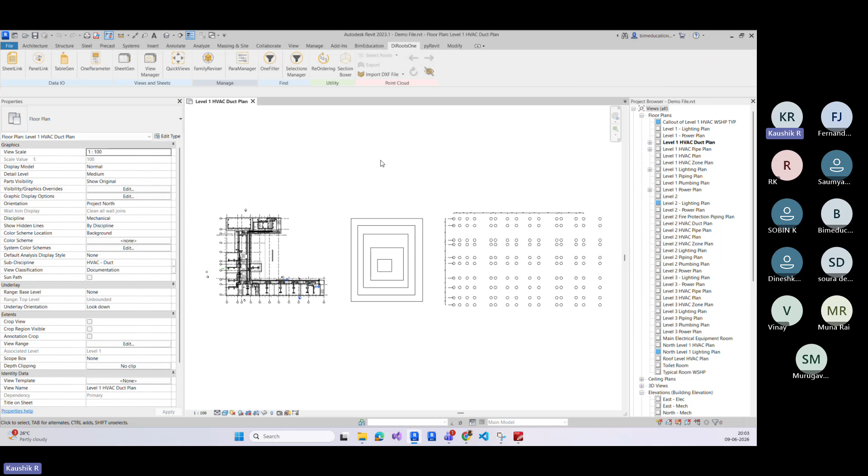Okay, before directly jumping into automation, first we have to understand why we need a plugin in Revit. In general, in Revit, if I go to the Revit tab, we have a plugin called DiRoots. From DiRoots, we have several sets of plugins. What is meant by plugin? The first question is, why do we need a plugin? Why do we have to use DiRoots? For example, in DiRoots, we have a tool called Pro Sheets. What is the purpose of Pro Sheets? How many of you guys are aware about the DiRoots plugin and still using it in your organizations? Can I get a thumbs up? How many of you? Okay, anyone? Good, good, good. So what is the purpose of Pro Sheets in the DiRoots tool? Through DiRoots Pro Sheets, we can export sheets with respect to our sheet name.

But do we have the same functionality in default Revit? In default Revit, are you able to export sheets? Can I get a yes or no? Are you able to export sheets from default Revit, sheets to PDF? Nobody done that one? Yes? Okay yes, of course we can do it. So in case if you are able to do it from default Revit, then why are we using DiRoots?

Because DiRoots gives some additional functionality. While exporting itself, I can customize the name, the file name, like what the file name has to be. Like that, I can do some customization. So that is the benefit of a plugin, guys. In Revit, not only Revit, you can take any software like AutoCAD, Revit, Navisworks, or general software like Word, PowerPoint, or Excel. So everywhere we can generate a plugin. What is the function, what is the purpose of a plugin? It means we are adding functionality to the default software, meaning whatever functionality you could not get from the default software.

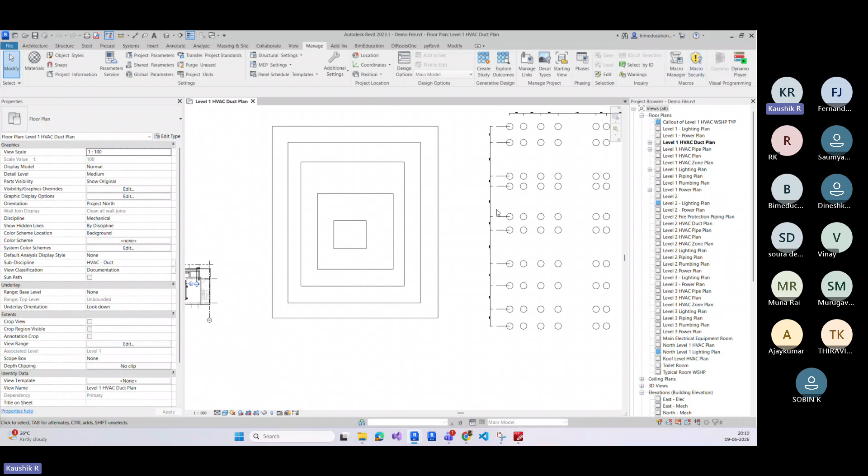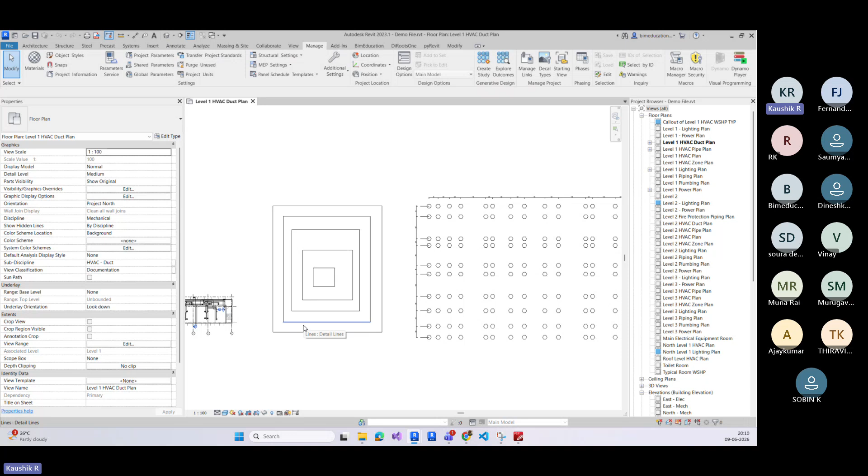Okay, minimize. Consider this is a CAD line. So how are we supposed to do design modeling? We do have design files through AutoCAD, right? So we have to import our AutoCAD file through our floor plan, and we have to draw our MEP elements - not only MEP, Revit elements, which means it may be wall, pipe, duct, conduit, cable tray, whatever it may be. That's how we are supposed to model our elements. Consider I have a floor plan where we have to create MEP elements like this. So what I'm going to do here is convert every CAD line into Revit elements.

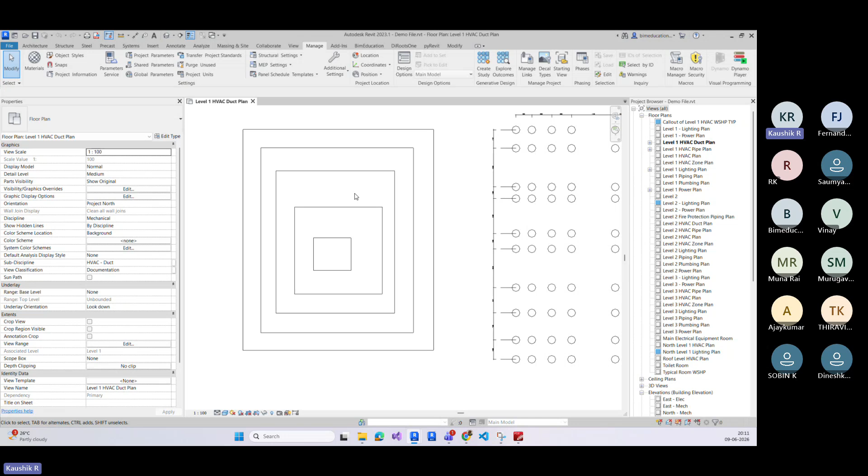Consider here I do have elements already in Revit itself, but in the actual course we will let you know how you can extract those lines from an AutoCAD file. I'm going to come to Dynamo. So here I do have elements, I'm going to select this one, minimize, select the entire lines. Just right clicking, freeze, run was started, run was completed, minimize. If you see, now all my lines were converted into walls. How much time will it take? Within 1 or 2 seconds we can complete the modeling. So this is one example, and another here we have another example.

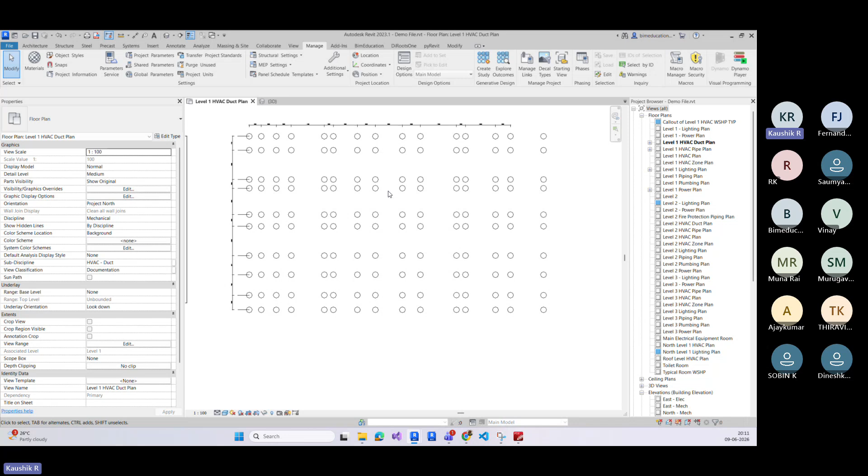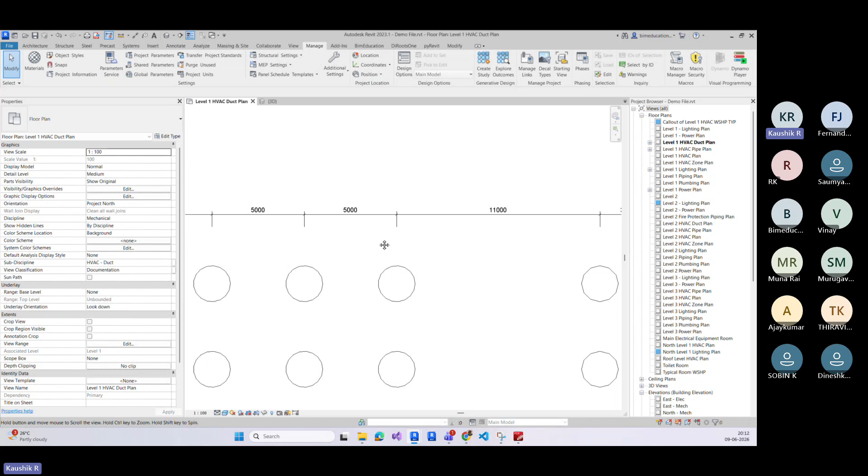We need to place families. Consider you are working for electrical stream, and you have to place multiple families like security devices, fire alarms, smoke detectors. For one floor plan you have to place around 1,500 families, and consider you have to place for multiple floors, and it is not typical. So how much time will it take? Also it is not generic, not following a common dimension - initially 4,000, 5,000, 5,000, then 11,000. Vertically the dimension is 4,500 to 10,000, 3,000. The dimension is not equally distributed, so you could not use array options - you have to manually place. So how much time will it take? We are going to automate this one.

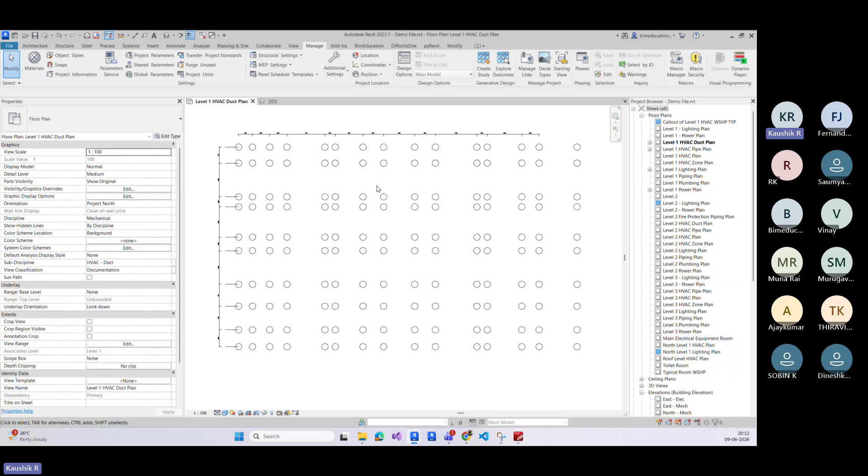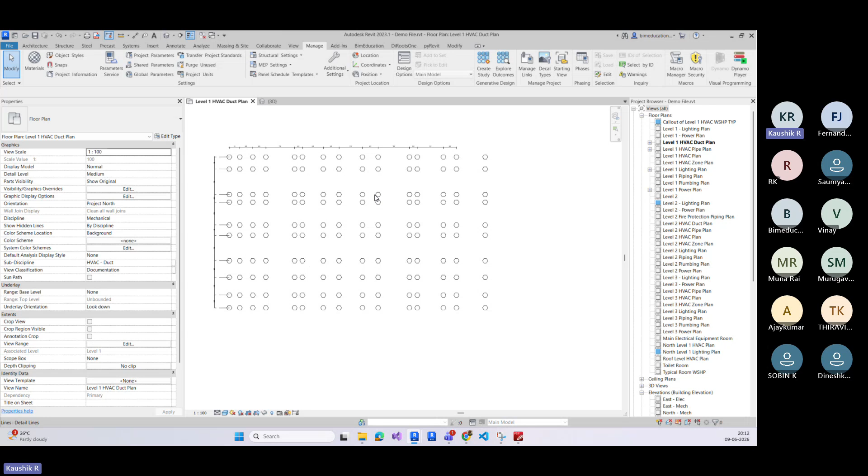Again, here we are taking examples from Revit itself, but once we start our actual class, we will show how to extract that information from the AutoCAD file. Coming back to Dynamo, this is for wall creation. I'm going to select, minimize, select all the source references, and coming here, freeze and unfreeze, select the run button. Run was started, run was completed. If I minimize, I can see all the families are placed. How much time will it take? 1 or 2 seconds.

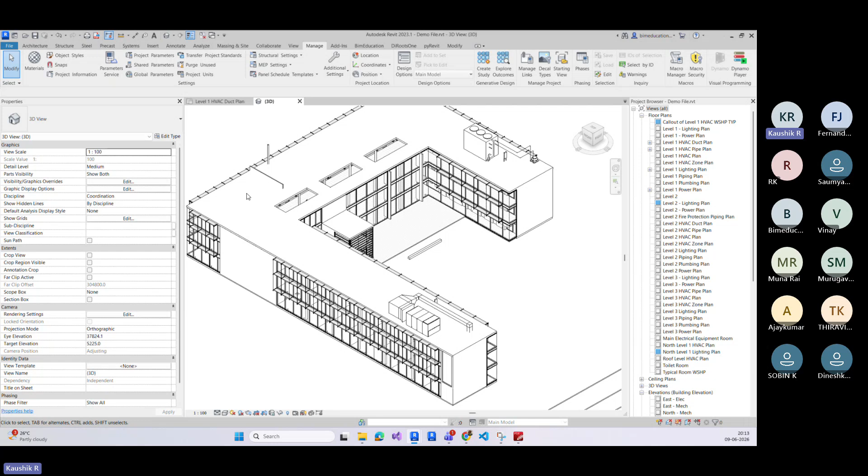Now this is the example for modeling. I want to do clash detection between wall and duct - wherever wall and ducts were intersecting, which means clashing. I want to extract those elements without Navisworks. Minimize, unfreeze, I'm running the tool, run was started and that was completed. If I minimize here, wherever wall and duct were intersecting, I highlighted those elements. Not only can you highlight, you can extract those element IDs. If I scroll, there are 166, 163 walls clashing with the ducts. If you want, you can extract those into Excel data. So you no longer need to go to Navisworks each time to get the element, right click, and take the element ID - you can easily extract into Excel.

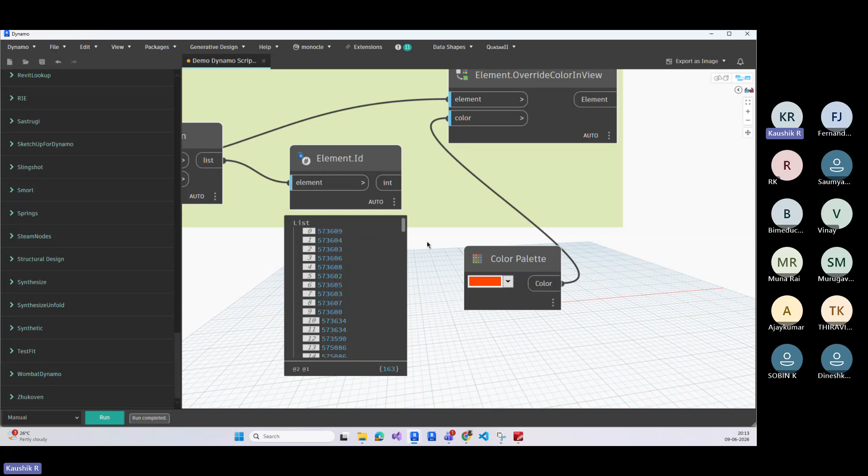Other example, sheet creation. Consider here I only have 5 or 6 sheets. I want 10 sheets at a time. Come back, select, right click, unfreeze, run was started, run was completed. If I minimize, I can see 10 sheets were created. How much time will it take? Only 2 seconds. Now is it clear? Again, in this example I only showed you how to create a sheet, but in upcoming classes I will show you how to create a sheet and how to put your views into the sheet. Is it clear guys? Can I get a yes now? Is it understood - like Dynamo, we can utilize it for each and every stage of construction?

Can I get a yes? Yes. Good, good. Okay, shall we go further? Yes.

Okay, good, wonderful. Now I have understood - if I'm working in Revit, I should know Dynamo, irrespective of the discipline. You may be working in civil, structures, architecture, plumbing, electrical, mechanical - irrespective of disciplines, if you are working in Revit, you should know Dynamo. Dynamo is not an additional skill, Dynamo is a mandatory and essential skill. If you know Dynamo, ultimately you can save plenty of your production time. Next one - now I have understood I should know Dynamo, but where do I have to start?

Where I have to start is to know and understand how Dynamo will work. That's what we are going to discuss now.

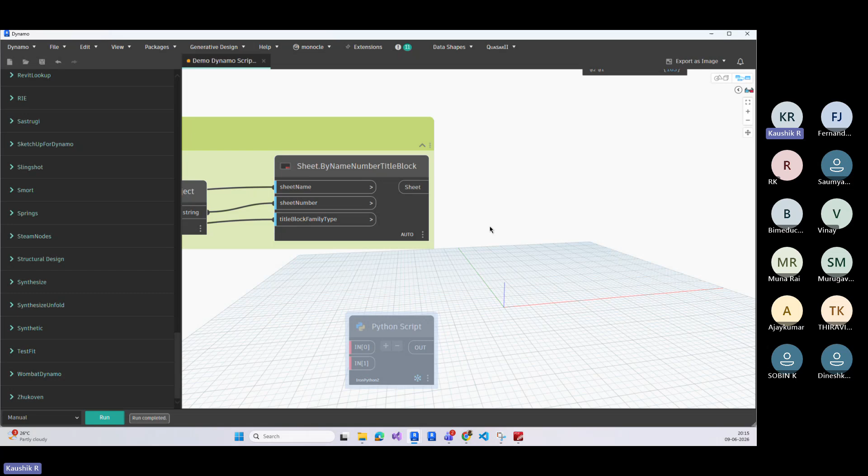First, you have to understand what is meant by a node. The simple question: what is meant by node? A node is nothing but to do some Revit operation. It may be anything - creating sheets, creating walls, creating levels, creating ducts, creating pipes, creating parameters, changing parameter values. Whatever work you are supposed to do in default Revit, the same thing you can achieve through Dynamo by means of nodes. For example, here I have created a wall by using this node.

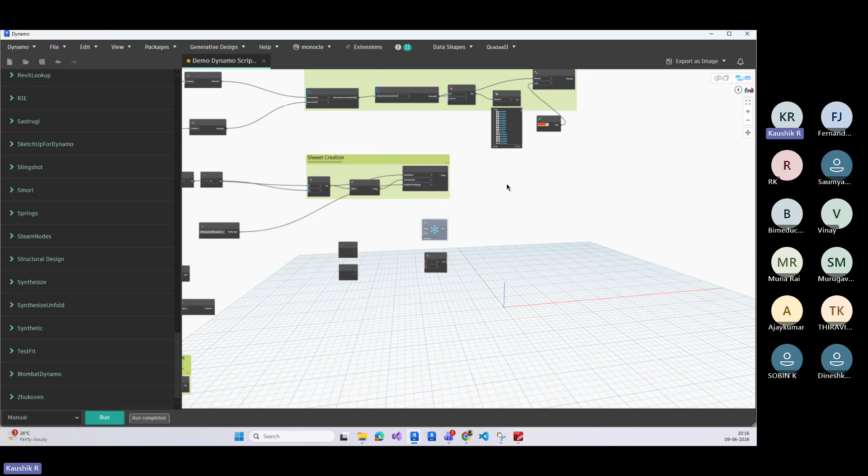I have placed a family by using this node. I have done clash detection by using this node. I have created a sheet by using this node. Later, you may work on any kind of task, but whatever work you are supposed to do, you can achieve the same thing by using a node. Is that clear, what is meant by node? In general, a node is nothing but to do some operation in Revit.

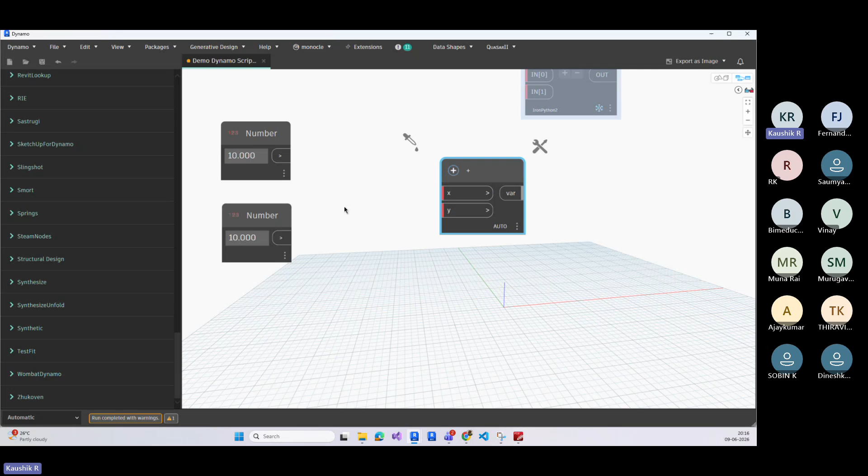I'm going to give you another example. Let's keep it as automatic. There is a node called the addition node. What is the purpose of this node? To add two numbers. I'm giving input 10 here and 10 here. What is the value of 10 plus 10? What output can I expect from this node? 20. If I hover over this, yes, we are getting 20.

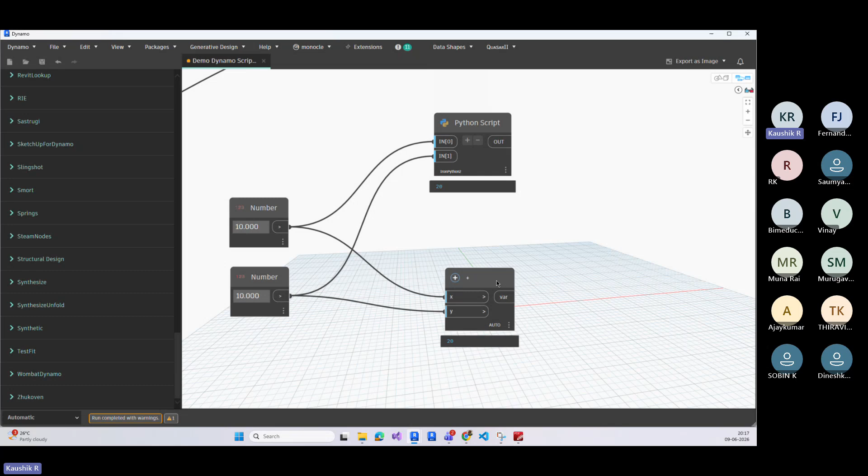The same node I have created through a Python script. Here also I'm giving the same inputs, 10 and 10, and I'm getting the same output, which is 20. Now we understood what is meant by node and what a node is made up of. These two are the same nodes, but this one was made using Python. I'm double clicking this Python node so we can see what it's made up of.

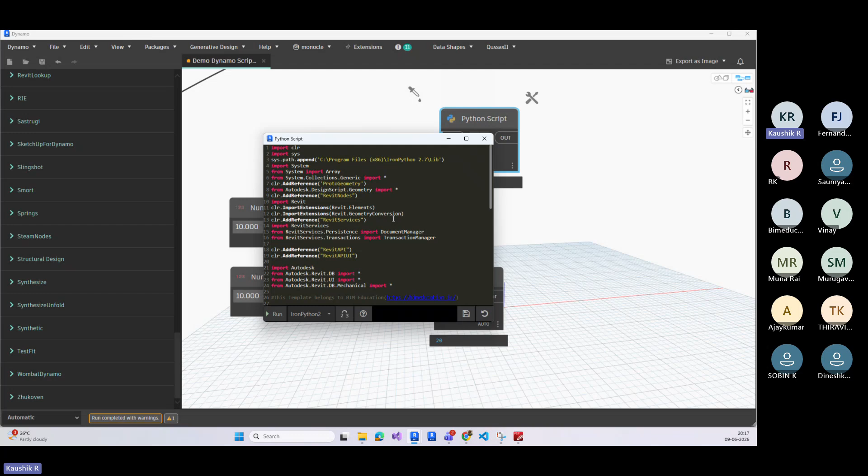It will take 2 or 3 seconds. What does it contain? What is a node made of? Nothing but programming lines. We don't know programming, that's why Autodesk and other developers have already given you a set of nodes to do Revit operations. By connecting inputs, you can achieve whatever operations you are supposed to do in Revit. Is it clear what is meant by node - Revit operations - and what a node is made up of? Nothing but programming lines.

Yes, I know I was a little fast, but we need to complete so many topics, that's why I was in a hurry. But when you join the class, our class will not be like this.

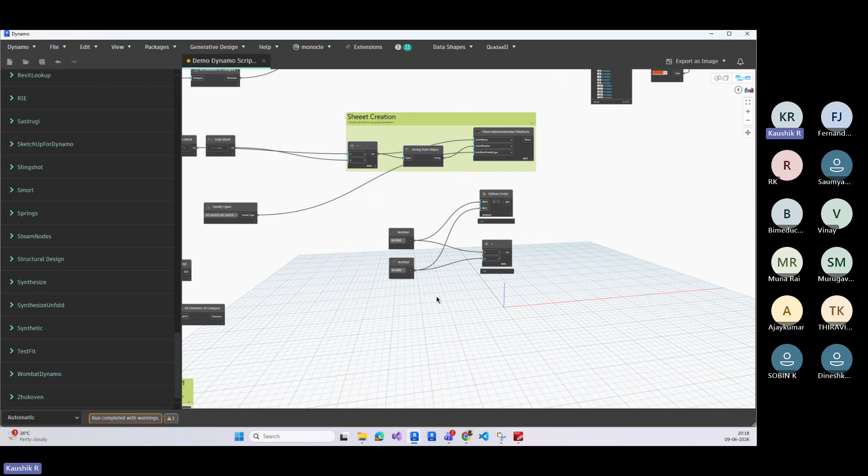Now I have understood what is meant by node and what a node is made up of. Now we are going to discuss how to connect two nodes. Here I have two nodes, categories and all elements of category. Why do we need this? This is the first tip of our demo class: whenever you are working in Dynamo, whatever task you are supposed to do, the first step is you have to bring your Revit elements into Dynamo. I'm telling you once again, whatever task you are supposed to do in Dynamo, the first step is you have to bring your Revit elements into Dynamo. There are other ways to do this, but this is one way, which is categories and all elements of category.

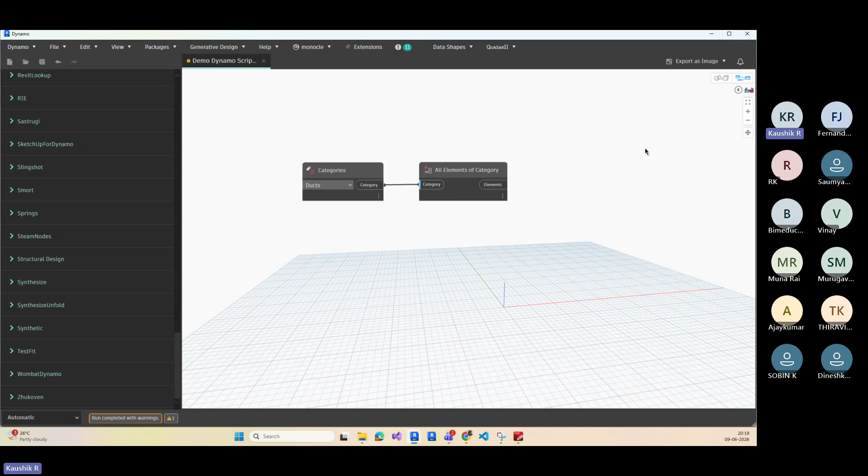What does it actually do? When I select the category, which is duct, it brings me all the duct elements into Dynamo. Once I bring my elements into Dynamo, whatever operations I wish to do, I can add parameters to this element, change the parameter values of those elements, delete the element, or move the element. Whatever actions I want to do on those elements, I can perform. Is that clear? The first rule is you have to bring your Revit elements into Dynamo.

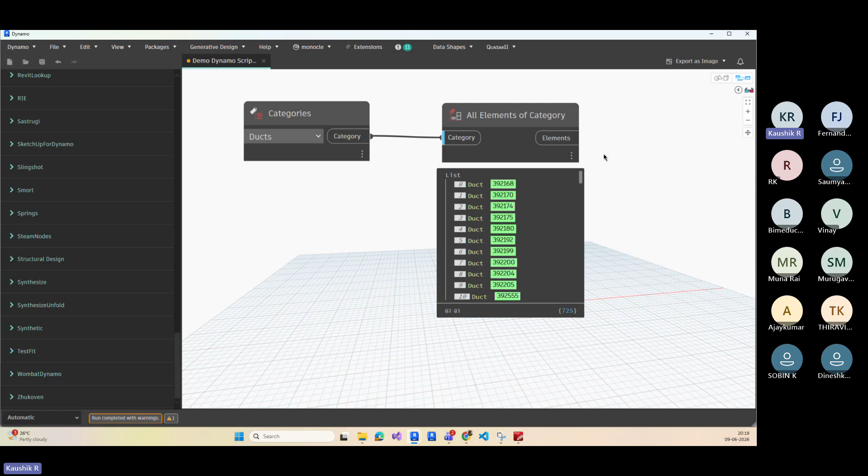Yes, wonderful. Now, second question: we have understood what is meant by node and what a node is made up of. Now here is my question - how to connect these two nodes? What is the logic behind that? What principle do you have to follow?

Okay, let's take another snap. So just give me one second. Let me connect my notepad. Where is it? Where is it?

Here, I do have the category, right? And here also category. Okay.

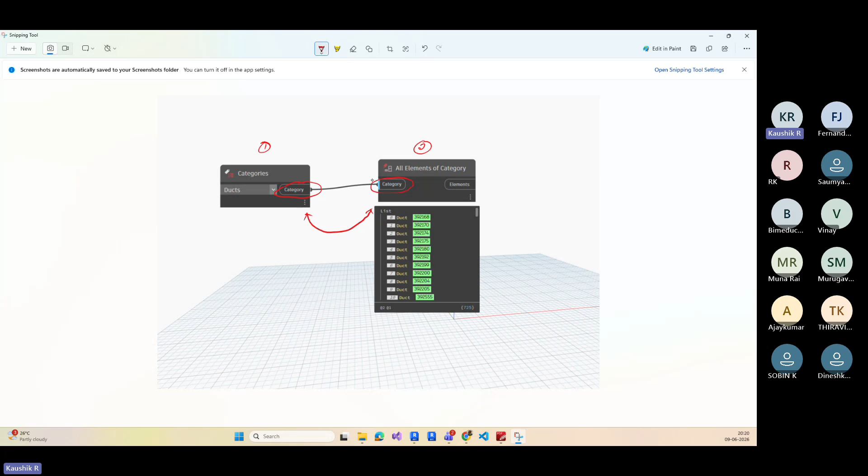Whenever you are connecting these two nodes, you have to understand one simple logic here. This is my first node and this is my second node. Whenever you are connecting two nodes, first node's output always equal to second node's input. This is the formula, okay.

What is the first node output? It was showing category. What is the second node input showing? Category, same category, which means category equal to category, right? Now my formula was satisfied. My requirement was satisfied, which means I can able to connect these two nodes.

Is it clear? Now, yes. Any doubts? What is meant by category here? Which is nothing but data elements, no, which is data type. Is it clear, guys? Which is data type.

What is meant by data type now? What are the data types currently we do have? Coming back here, we do have data types like integer, string, double, and boolean.

What is meant by integer? Which means it have to be whole numbers, 1, 2, 3. It is a general programming concept. This is the only programming concept which you have to understand, not anything else. Integer means whole numbers, 1, 2, 5, 5, 6, 3, 2, 8, 8, 9, 9, 5. These are the whole numbers.

String means alphabets, BIM Education, Dynamo, Kaushik, Beta, Revit. These are alphabets. What is meant by double? Numbers, but with decimal values, 0.5, 52.56, 89.55. Okay, what is meant by boolean? Yes or no, true or false, zeros and ones.

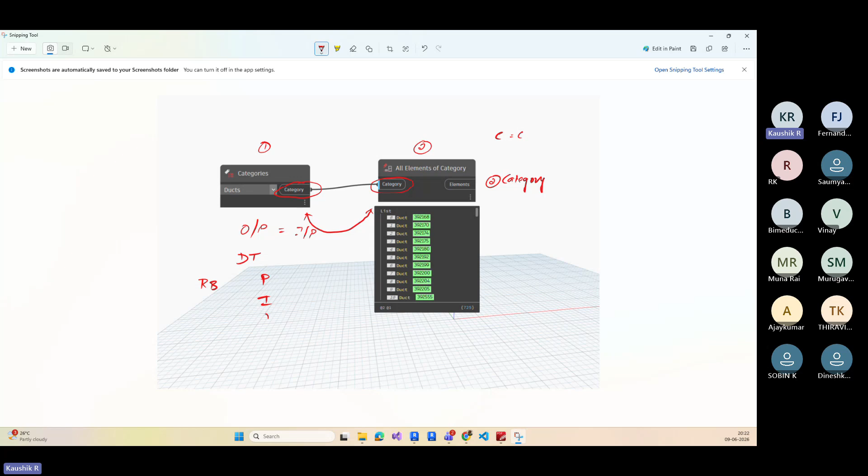Data type, we do have two types, which is Revit based data type and program based data type. In program based data type, we do have integer, double, string, boolean. Revit based data types, we do have so many, which is category, elements, wall, pipe, duct, everything. It's a Revit based data type. Is it clear, guys?

So far, anyone have any doubts? Wonderful. No, sir.

Okay, here, when I talk about data types, so right click, I'm searching for the data type. Yes, I do have string. Okay, I right click, I'm searching for a boolean. I do have the data type.

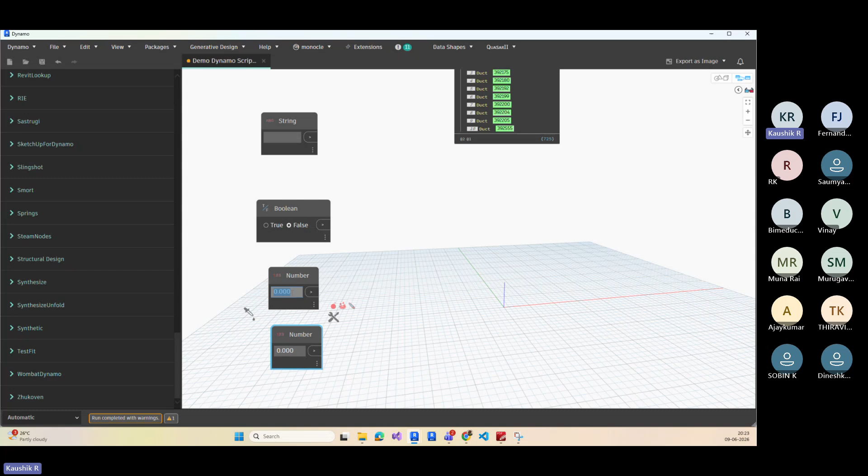Okay, so what else data type we do have? Integer and double, right? I right click, I'm searching for integer. Okay, that is a number slider only. So what we have to do, through the number node, we can able to create both integer values, 55, and double values, 55.65. Clear, guys?

Anyone have any doubts? Now, this particular node was expecting category data type. Yes or no? Instead of giving category data type, what if I give the string data type? Will it accept or not? I think it accepted, but error it's showing.

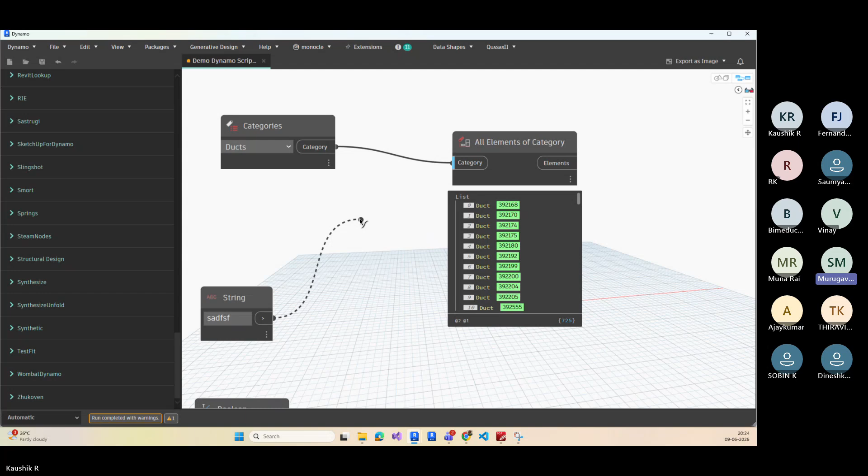It won't accept. If I connect this one, it will show the error. When I hover the error, what it was telling: ElementQueries.OfCategory, which is nothing but the name of the node. It was expecting, which means you have to connect either category or else view. It will accept only category and view, but was called with string.

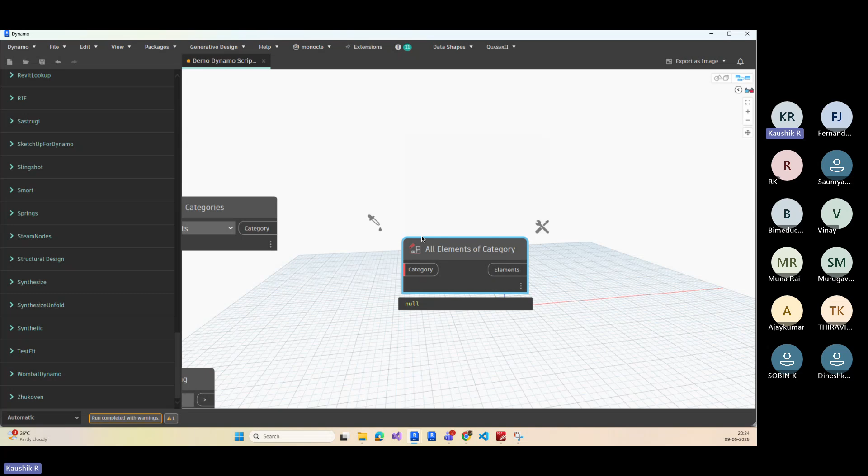Very simple example: you are having a file which is PNG. And if you try to open that PNG file from VLC media player, will it accept or not? It will throw the error like unsupported format. Data type is nothing but format. We do have formats like .rvt is a format, .dwg is a format, .png is a format, jpg is a format, mp3 is a format, mp4 is a format.

Do we able to open an mp4 format file through Revit? Yes or no? Will it open or not? It will not open, we can't able to open. Can we able to open a .rvt file through VLC media player? Will it accept? No, it's not accept. It will throw error which is unsupported format.

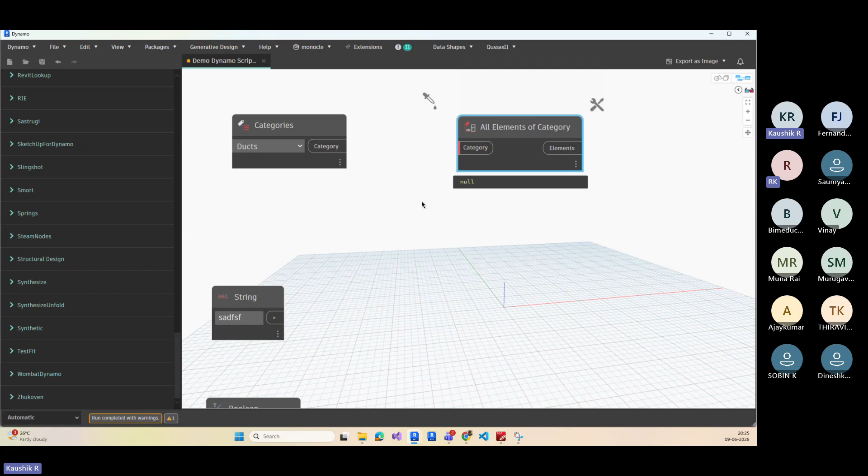Just like that here, guys, it was expecting category. Instead of category, if you are trying to connect other data type, it won't accept. I believe now you are able to understand what is meant by data types. Yes or no? Any doubts regarding data types?

Any doubts regarding data types? If no, please do say mention no, so that we can go to the next topic.

No sir. Okay, so what is meant by string, guys? Is character or something alphabetic. Okay, what is meant by integer? Integer means a whole number, I think. Okay, what is meant by Boolean? Yes or no, or true or false, something like that.

Wonderful, wonderful, wonderful. Okay, now let's come to the actual topic. In Revit, in Dynamo, we do have types of nodes: creation, action, and query.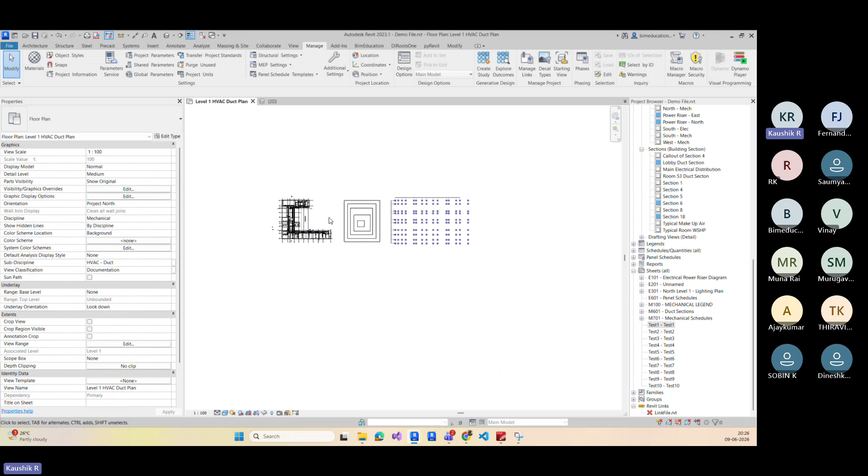What is meant by create, action, query? If I minimize Dynamo here, if at all I'm going to create something new - I'm creating a new duct here, I'm able to create a new pipe here, I'm able to create a new sheet here, I am able to create a new view here, I am able to create a new level here. If you are supposed to create something new, that is the meaning of creation. If you want to create something new in Revit, you have to use creation nodes.

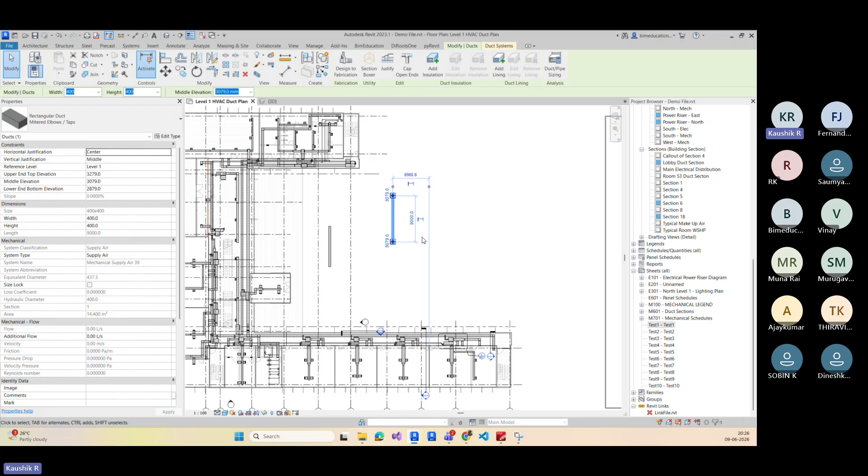What is meant by action? The element was already existing, I'm not going to create anything new here. I'm going to modify this element - instead of middle elevation 3075, I'll keep it as 3000. What I've done here, I'm not creating anything new, I just modified the element, which is known as action. I can modify the parameters, I can delete this element - this will also be accepted. So this is what is meant by action.

Then what else do we have? We have query. What is meant by query? We are not going to do any creation here, we are not going to do any modification here, just we are going to collect the element information. I'm just selecting the element, I'm just going to collect - what is the element elevation, what level it was located on, what is this horizontal justification value, what is this width value, what is this height value, where it was located, what is the comments parameter value, what is the mark parameter value. Like that, I'm just collecting the information only, which is known as query.

Clear? Now in Revit, based upon what type of operation you are supposed to do, based on that you have to create your script. If you are going to do creation in Revit, then the node searching strategy or working principle will be different. If you are going to do action, then everything will be different. If you are going to do query, again you have to follow a different strategy. Is it clear? Based upon what you are supposed to do in Revit, you have to apply the strategy in Dynamo. Is it clear, guys? Can I get this?

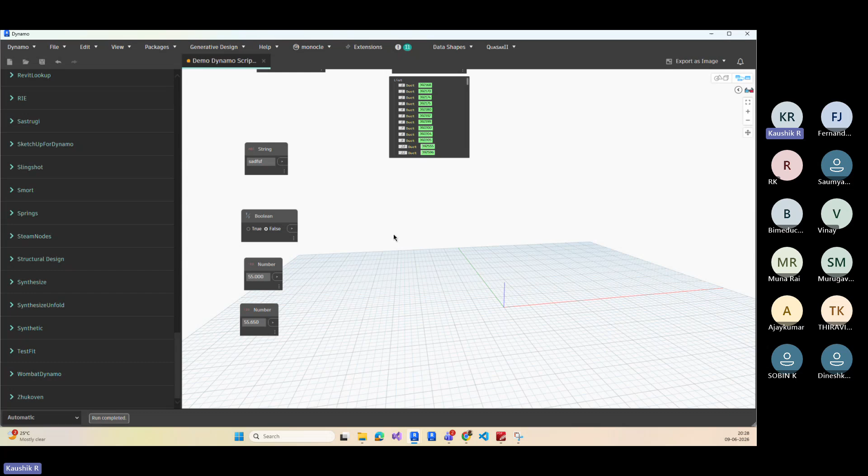Okay, so we have, as I mentioned, three types of nodes: create, action, and query. Create and action we are going to discuss through live classes, so today we are going to discuss query. What is meant by query, guys? I'm not going to create anything, I'm not going to do any modification, just I'm collecting element information only. Is it clear? So for that, what is the node searching principle you have to follow, which is very simple.

What you have, dot, what you want. I'm telling you once again: what you have, dot, what you want. What you are holding and what you want to do with that element - that's the node searching formula.

Okay, let's take a basic example. Here I have an apple, right, and the apple has information called weight, size, place of origin, price, and color. Now if I want apple's weight, how am I supposed to search a node? So I have apple - what you have, I have apple. What I want, apple's weight, so apple dot weight. If I want apple size, apple dot size. If I want apple color, apple dot color. If I want apple's place of origin, apple dot place of origin. Okay, should we go on?

I'm going to go on to the next example, and you people have to answer. Now I have a scooter. If I want scooter color, how do I need to search a node? Scooter dot color, scooty dot color, something. Yeah, okay, scooter dot color, wonderful. If I want scooter engine - scooter dot engine. If I want price - scooter dot price. If I want brand name - yeah, scooter dot brand. Wonderful.

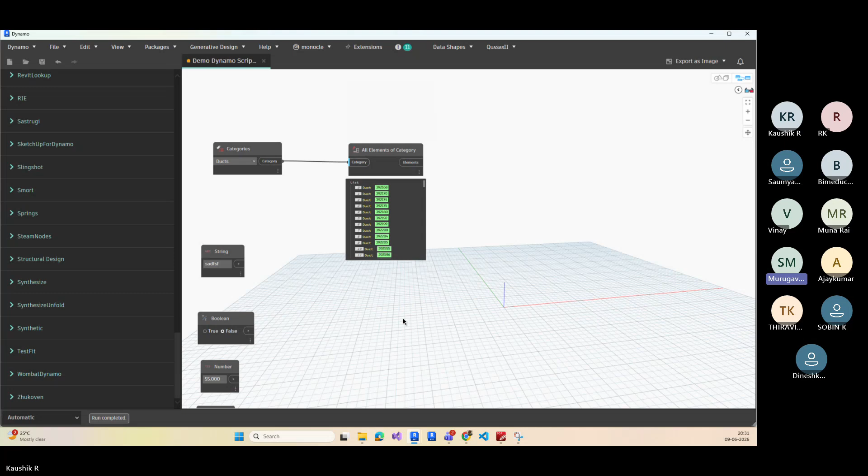Shall we apply the same thing in Dynamo? Yes, here we are collecting all the duct elements.

Okay, I don't want to keep it for the entire duct elements. I want to keep it for only this particular element. Then what do I have to do? As I mentioned, this is my task, guys.

I want to know this element's name. Tell me which category it will come under, whether creation, action, or query. I want to know this element's name - it's a query. Wonderful, it's query.

Okay, let's commit here. The first step we have to do is bring that element into Dynamo. If I use 'categories' with 'all elements of category', all the ducts will come. I don't want to keep all the ducts, I want only one duct.

So for that we are using Select Model Element. Is it clear, guys? Through Select Model Element, I can select only one element. I'm selecting here, minimize, I selected the duct here. Okay, I do have the element now.

Next, what do we have to do? I have to search and connect another node. How am I supposed to know? How can I search for a node? Right click.

Here I search - do I have the element, right? Here I do have the element, and I want to know the element name. You search it by 'element' - element.name. Okay, element.name, I do have the node selected. If I connect this one, I can get the element name.

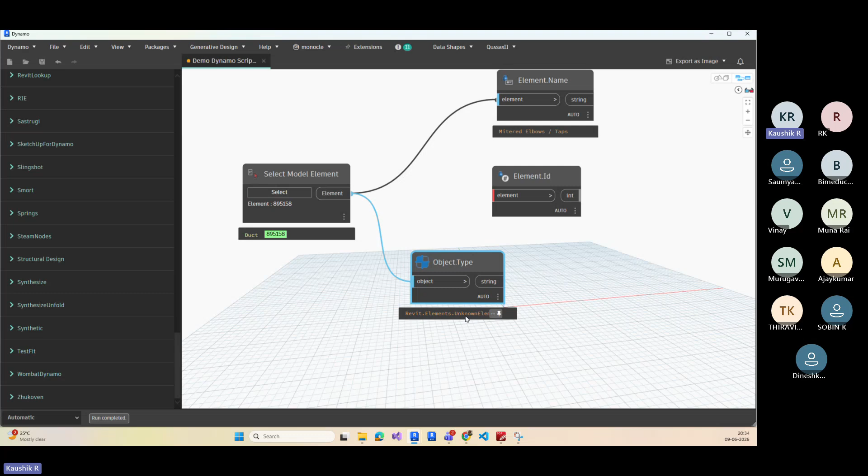When I connect this one, it tells you Revit.element.unknown element, which means it is giving you element only. How are you supposed to know? Whenever you see dot notation, you have to take the final value. What is the final value here? Revit.element.unknown element, which is element only.

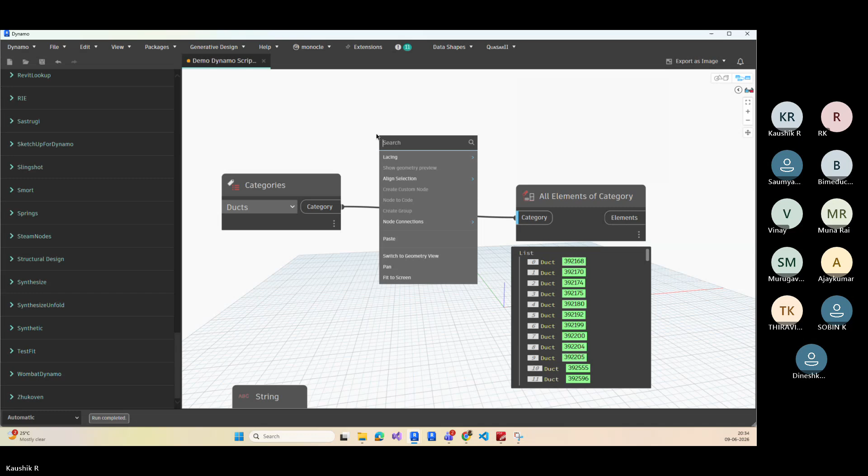So coming here, I do have category nodes, all elements of category nodes. How am I supposed to know which data type this node is giving you? What do we have to do? Yeah, object.type. We have to use the object.type node. I'm connecting this one, so what was it giving you?

The category. How are we saying it is category? Because after giving you that dot notation, we have to take the final value, and the final value is category. Is that clear? Category. Now I have understood how to identify the first node's output data type, right?

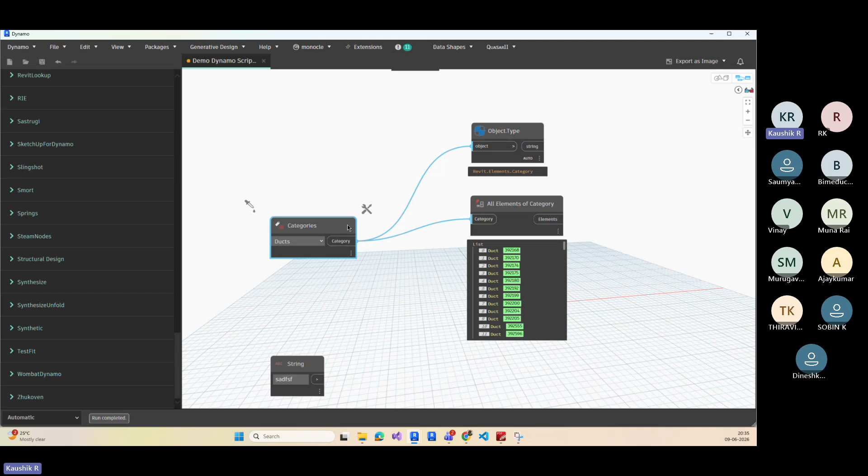But how can I understand the second node's input data type? Do we have any node for that? No. Then how can I understand it? The simple logic is you have to move your cursor to the particular input, then it will highlight. What it was telling - it was expecting the category. This is how you have to identify the first node's output data type and the second node's input data type.

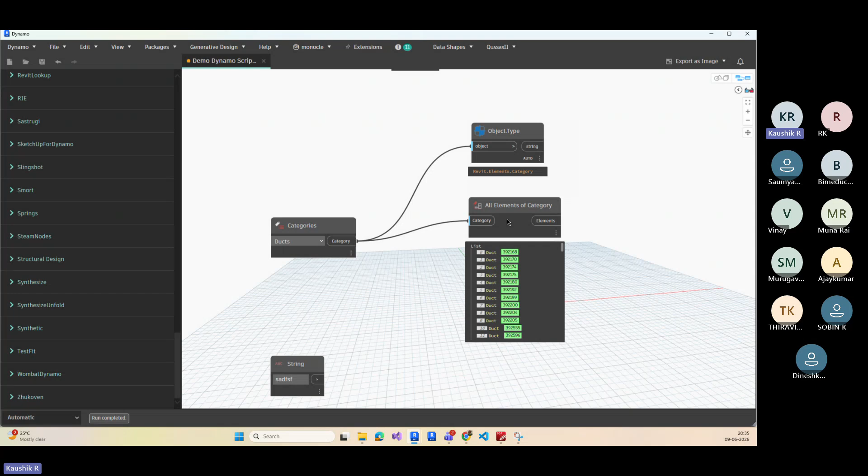For the first node's output data type, you have to use object.type. For the second node's input data type, you have to move the cursor to the input and it will highlight which data type it was expecting. Is that clear, guys? Yes.

Okay, shall we go here now? This is the formula, right? I do have element ID. I want to connect this. What is the formula? I have to identify the first node's output data type, which is Revit.element.unknown element, which is element.

With what was this particular input expecting? How am I supposed to know? What do I have to do here now? Yeah, go to exactly that element. Okay, I came to the element now.

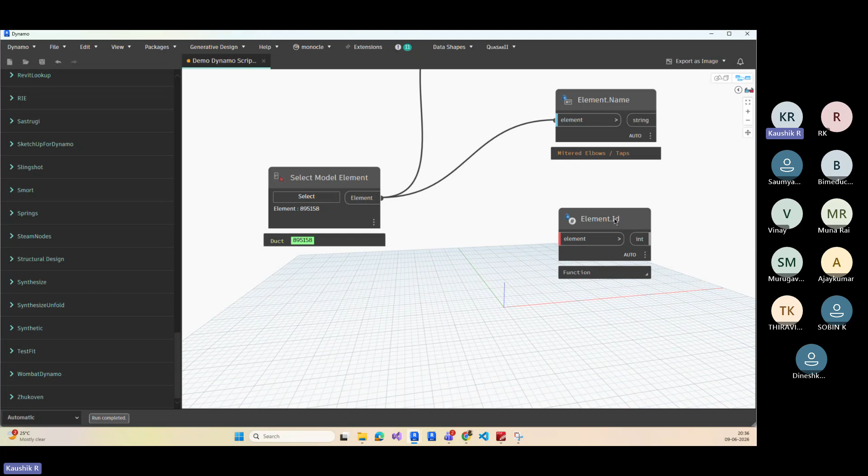It's not showing anything. What do we have to do? Again, you have to move to the input only. Not here. You have to move to the input. If I move the cursor to the input, what was it telling? Element. How are we telling it is element?

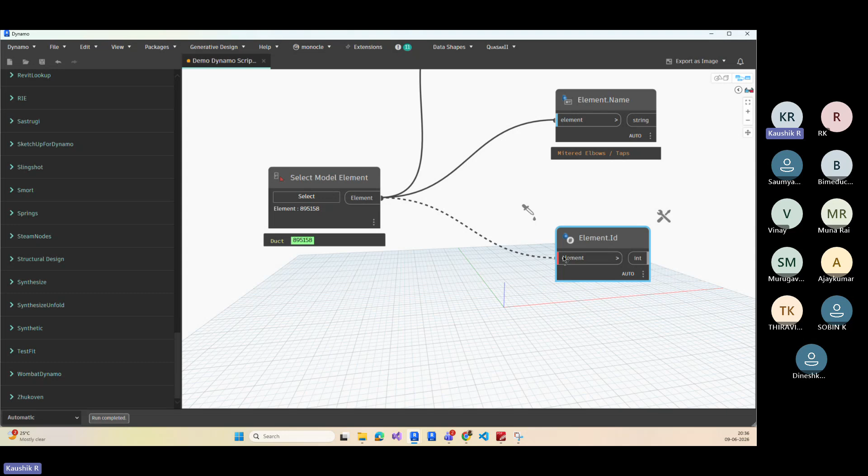After that, you're intimating the dot, the Revit elements after that. Because whatever IntelliSense is showing me is dot notation. If it is dot notation, I have to take the final value. The final value is element, which equals element, so that I can connect these two things. Is that clear? Yes.

Okay, now we know how to extract the element name, how to extract the element ID. Now I want element parameters. I do have element. I want element parameters. What do I have to do now?

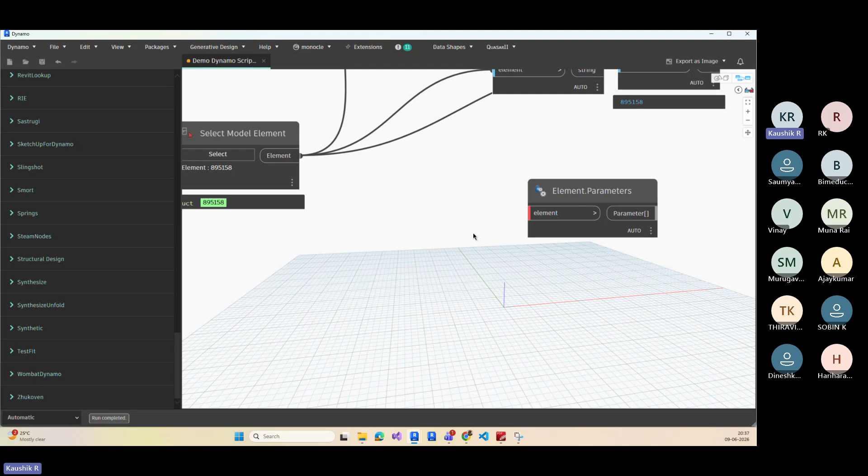What am I having here? What am I having, element here? Parameter. Super element dot parameters. Okay, I took the node. Now this node has some inputs. We don't know which data type it was expecting.

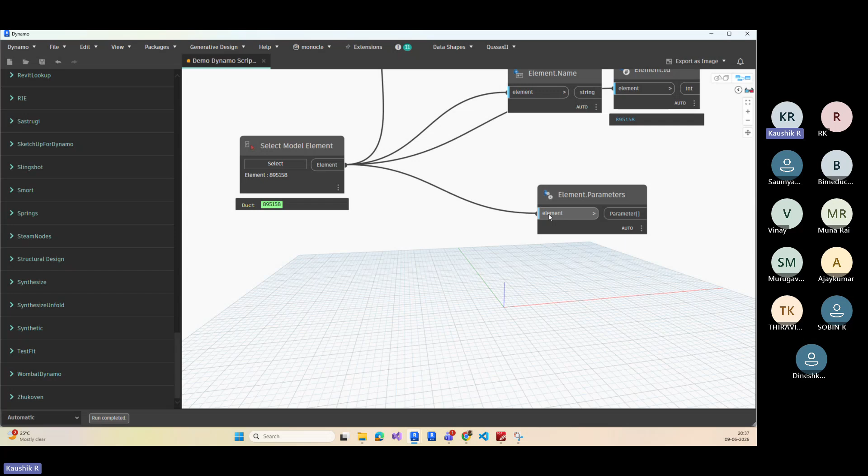What do we have to do? Stick with the procedure, guys. What is the procedure we have to follow here? I think we have to go to the element part and check what it's asking. Wonderful, guys, Dynamo is a very easy software. You just need to understand the characteristics and procedures, for which scenario, what procedure you have to follow. If you understand the things, it's the most interesting and very easy software.

I got the element parameters now. Now I want element location. Then same, element dot location. Element dot location. When I give element dot location, it is not giving me any node.

Okay, so to search a node, we have 8 different methods. Dot notation is one method. Still, how many methods do we have? 7 methods. Those things we will discuss during live class. So when my first strategy failed, I went for the second strategy, which is get location. Clear? Okay, we have 8 strategies to follow to get the searched node.

Okay, if the first strategy failed, I need to go for the second strategy. There is no method where you can directly go. If someone is directly typing, it means they already have experience with that, or else they simply memorized it. So in Dynamo, it's trial and error only. You need to check if the first method is working; if okay, fine, well and good, you proceed. If the first method is not working, you have to go for another one. Is that clear?

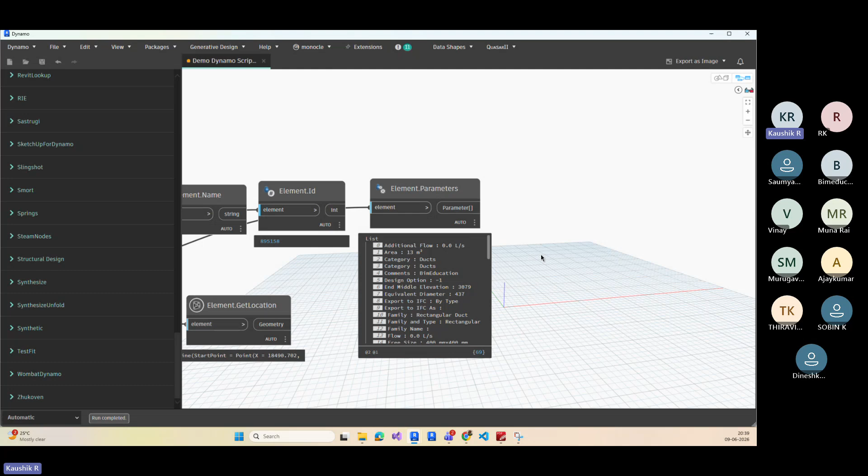Yes. When I give element parameters, okay, if you notice, I'm able to get all the parameter names and values. I don't want the entire parameter name. I want only the mark parameter value. I want only the mark parameter value. Now, what is the type of work here?

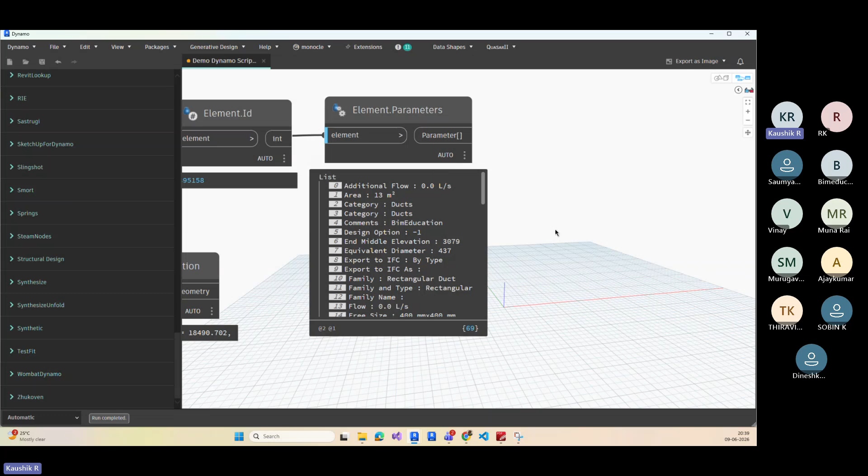Create, action, or query? I want only the mark parameter value. Query. Why is it query? Because I'm not creating anything new. I'm not modifying anything, right? Yes. Okay, so what is the first step I have to do?

Is that clear? Yes. And that's the reason we have to bring the element. So how are we supposed to bring the element? So many methods. Here I want to bring only one element, and that's the reason we are using select model elements. Again, to bring your Revit element into Dynamo, plenty of methods are there, we will discuss in live classes. Okay, I brought that element, guys. Next, what do we have to do? What type of work are we supposed to do here?

If it is all query, what is the node searching strategy we have to follow? Which is dot notation, based on what we have and what we want. I have element, I need a parameter, so dot value. I need only one parameter value, so get parameter value.

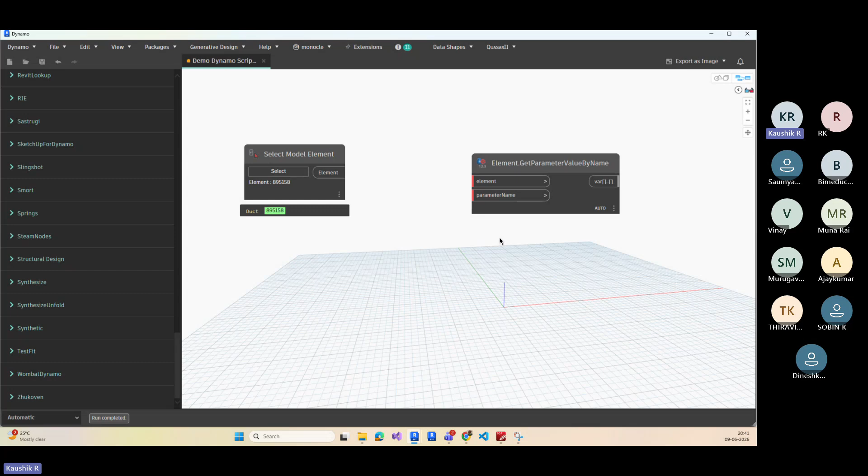Now I took the node. How many inputs does this node contain? Two. What is the first input it was expecting? Which data type was it expecting? Element. This is where people make mistakes.

You should not come to conclusion on your own that it was expecting element. You always have to stick with the procedure. If I go to the cursor element, what is it telling you? Element one, it's element. It was expecting element, where do I have element? Here I have this element. I can connect this one. Okay, we completed the first input.

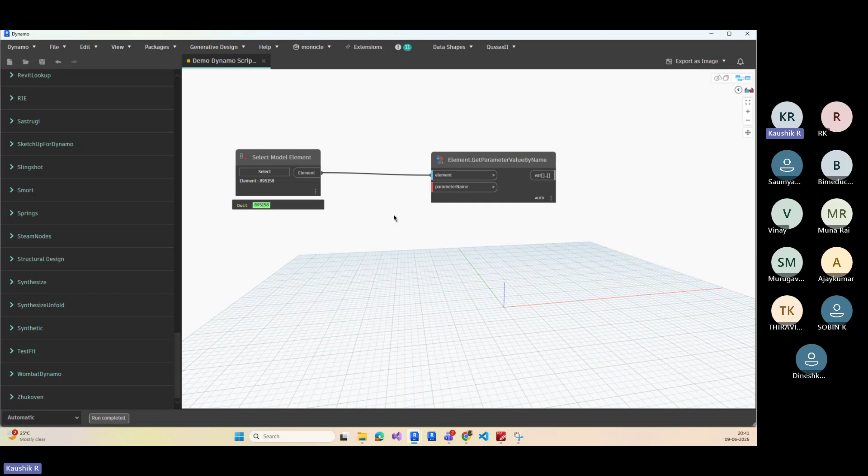What about the second input? What was it expecting? I have to move my cursor to the input. What was it telling you? Which data type? It was string. It was expecting string. Right click and search for string. I have the string node.

Now inside string, what do I have to give? Move my cursor to the input. It was telling the name of the parameter whose value you want to obtain. For which parameter you want to extract the value, you have to type that parameter name here. I want to extract the parameter value of mark, so I'm giving mark here. If I connect this one, I'm able to get the mark parameter value, which is 55.

Select the element, I'm having mark parameter value is 55. If I want the comments parameter value, then you search string, instead give comments. If I connect this one, I will get the comments parameter value.

What if I want to get the middle elevation value? We have to write middle elevation. If I connect this one, I'm getting the middle elevation value.

Anyone have any doubts here so far? No. Okay, what we've done so far is only query.

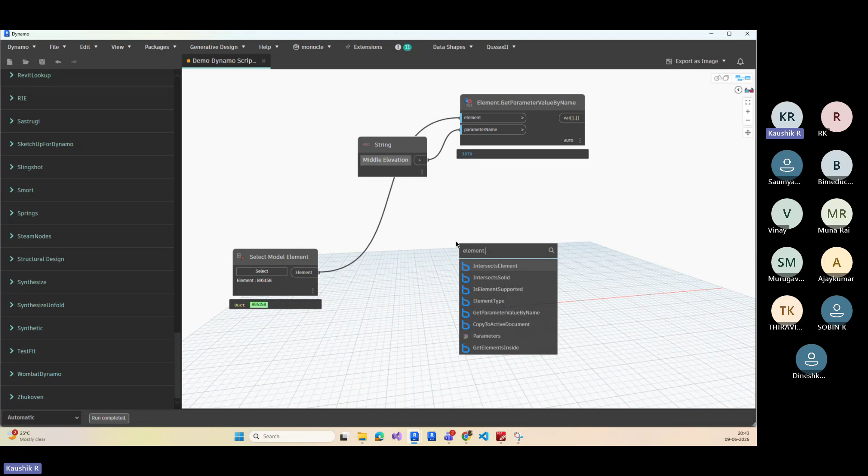Now I want to do some action, which means I want to modify the parameter values. What is the node setting strategy I have to follow here? I will let you know in the live classes. So I'm telling: element dot set parameter by name. I took the node, without explaining the actual formula behind it, I directly took the node. Once you join the class, we will let you know how we are supposed to search a node for action and query, what is the formula behind that.

We will discuss that in the live classes. Now I took the node. How many inputs do we have here?

Three. What is the first input it was expecting? I have to go and move the cursor to the particular input. What was it telling me? It's element. Where do I have the element? Here I have the element, I can connect this one. First input was completed.

What about second input? Again, go and touch the name. What was it telling you? It's string, asking for string. Which data type was it expecting? String. Okay, right click.

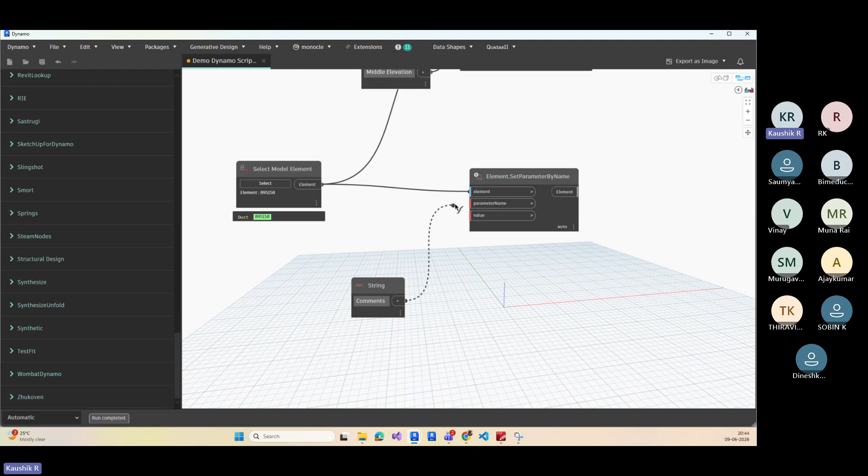I took the string, and here I want to set comments now. I connected comments. Then what about value? You go to select. I moved the cursor to value, what was it telling you? It's a variable.

What does it mean where it is only written? It means, guys, it can be any data type. You can connect string, double, boolean, integer, whatever you want, you are able to connect. But the catch is here: based upon what parameter you are supposed to set the value, that particular parameter's stored data type you have to mention.

I selected the element, here I have a parameter site. What is the parameter data type? When I give horizontal justification, what is the value here? It is a string.

Now I'm going to tell the parameter name, and you guys have to tell me whether it is string, integer, double or boolean. Shall we try? Yes. Vertical justification, what is the data type? It's a string. Size, sorry not size, width.

It's integer, boolean I think, sorry not boolean. 400 is integer, right? Integer. Middle elevation, integer. In the middle elevation, I can have 3079.5 also, right? It will accept, which means it is double.

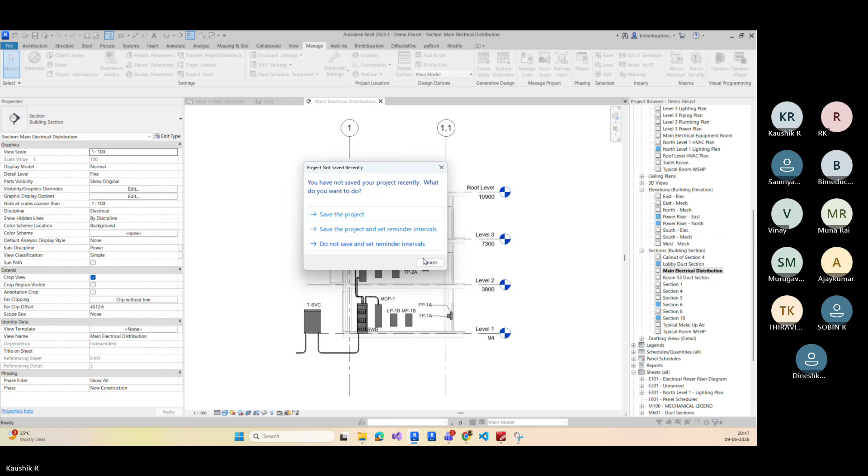Let's open some, cancel, select this one. Enclosure, what is the data type of enclosure?

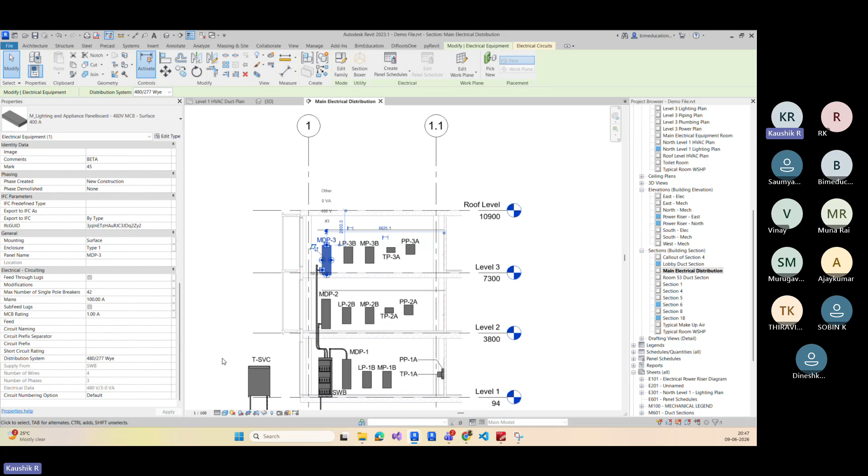What is the data type of distribution system? It's a string, even though it has a number, right? Because I will take a string node, and then a number node. From the number node, we can able to create both integer and double. In the string, if I'm typing alphabets, it won't give any error. In the number, if I'm typing numbers, it won't give any error.

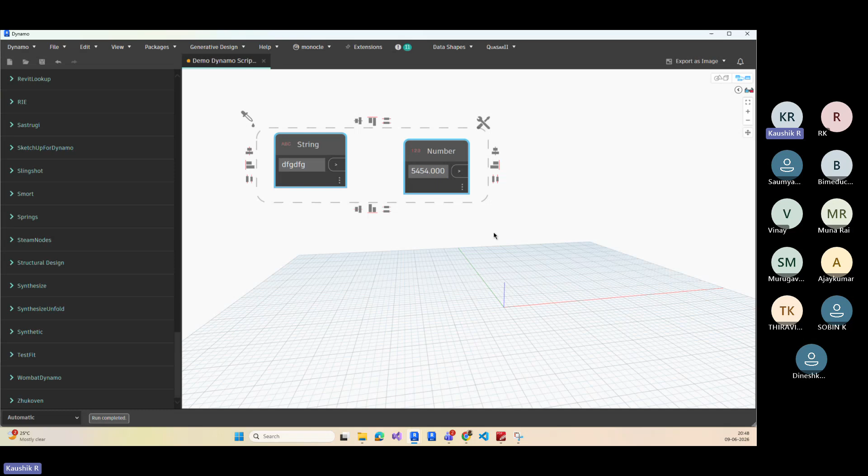Control plus C, control plus V. In the string, I'm keeping alphabets and numbers, it won't give any error. In the number, I'm keeping alphabets and numbers, it will give error. Now in the string, I'm keeping only numbers. In the number, I'm keeping only alphabets. It will give error.

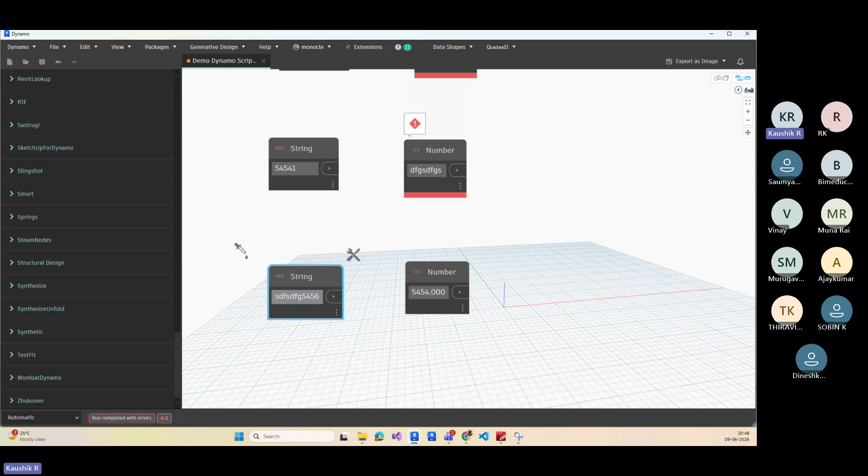In the string, I'm keeping words, numbers, special characters - it will accept. In the numbers node, words, numbers, special characters - it won't accept. So what does this mean? In the string, you can able to keep both alphabets and numbers, only numbers also, and special characters also - it will accept.

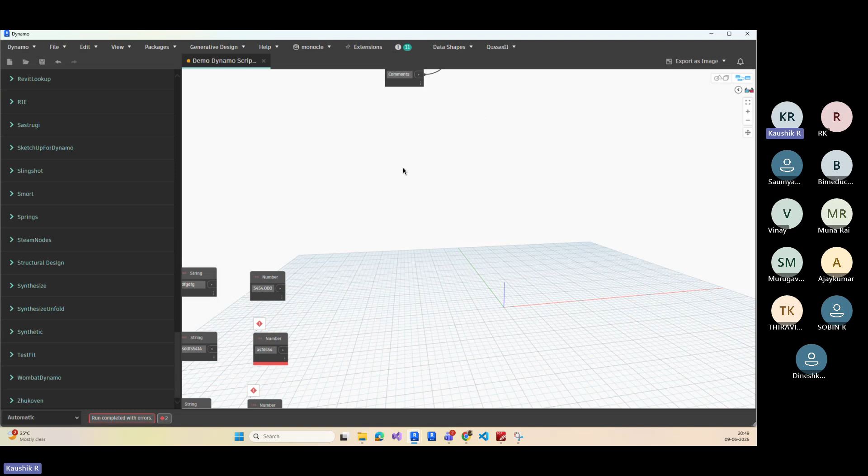Clear? Yes, clear. Now based upon your parameter data type, you have to use the value accordingly. If I'm going to set a value for comments, what is the comments data type here? It's a string. Then which data type node do I have to use here? String only.

In the comments, what is the previous value? It is BIM education. I'm going to change this to beta. If I connect, what will happen? It will change, I think. It will change - okay, I connected this, and now my value was changed into beta. Is that clear? Okay.

In the middle elevation, what is the value? 3079.5, right? I want to change the middle elevation value. Then what do I have to do? I remove the value, and instead of comments, we have to type middle elevation. And remember guys, this is case sensitive - middle elevation.

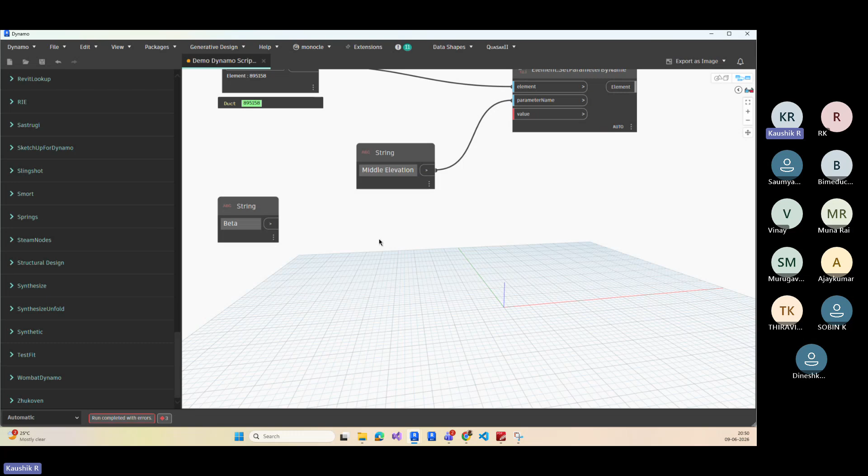Now tell me, what is the data type of middle elevation? It's a double. From which node can I create a double value? Number node. In the number node, instead of 3079.5, I'll keep it as 3000 only. If I connect, what will happen? It will change. So I'm connecting this one. If I minimize, now the value was changed into 3000, yes or no? Yes.

Okay, very wonderful. Now connect this element. What is the data type of mark? 55, which is integer. Wonderful, integer. So I change the value, remove the number here, and instead of middle elevation, keep it as mark.

Okay, now we have to use number node. So current value is 55, right? Current value is 55, and I want to keep it as 56. So I'm keeping it as 56. Now I'm connecting this node.

Wow, there is an error. I hover over the error - parameter storage type is not a number. It is telling mark parameter is not a number, but we are clearly seeing it is 55. 55 is a number, right? Then why is it not accepting? So it may be an integer or something. It could be, I think.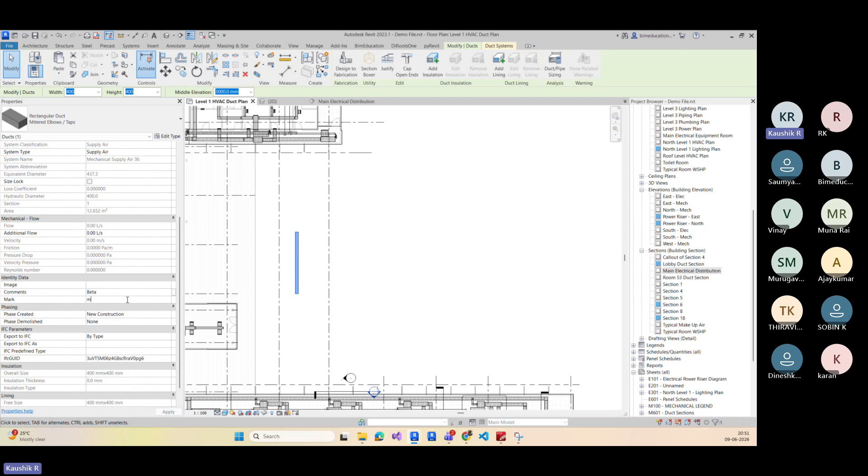Why? Because in the mark parameter I can able to keep 55, but I can also keep this value too. It will accept, right? Which means mark parameter value is string. So if I want to give 56, it has to be in the string. I'm giving 56. Minimize - now the value will change into 56. Is that clear? Yes.

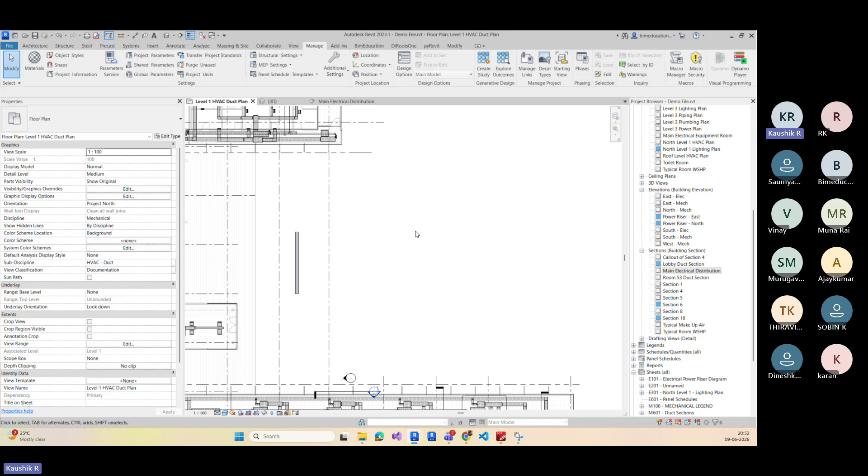Wonderful. Now horizontal justification - what data type is it? It's a string. Correct? Take this one, I'm keeping horizontal justification. Currently it is center, I want to keep it as left. That's my requirement, so what we need to do in the string node is keep it as left, right? Yes.

Now I'm connecting this one - there's an error. What is it? Parameter storage type is not a string. But we are clearly seeing it, right?

CENTER, which is a string. Okay, then how come it was working? That's what I'm telling you guys. Dynamo is a very easy tool, but you have to understand the logic and characteristics. There is a way to identify the parameter storage type. By viewing it yourself, you should not come to the conclusion that this is a string.

Shall I tell you the data type for this one? Horizontal justification, which is integer. Instead of string, I'm going to connect number and keep the value as 1. Before connecting, I'm showing you which is center. If I connect 1 here, it was accepted. Minimize. Now it was changed into left.

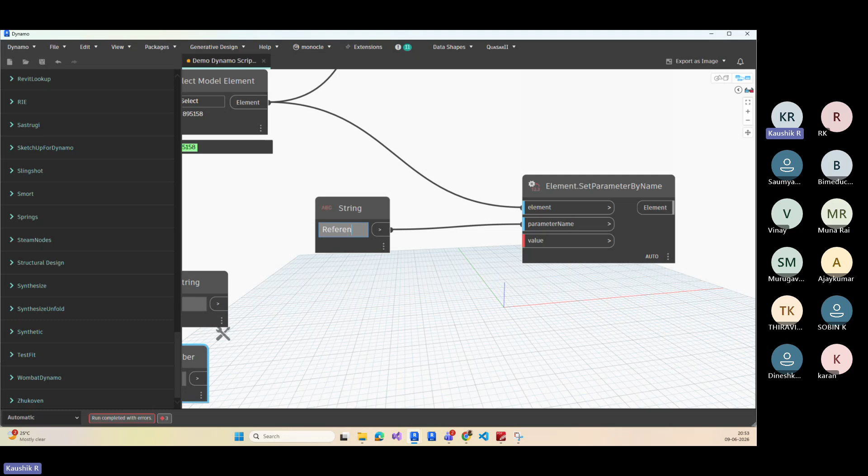What is the data type of reference level? By viewing it yourself, tell me what is the data type? It is string, right? Shall we check? So here I'm telling, reference space level. Currently, what is the level? Level 1. I want to keep it as level 2. In the string, I'm keeping level 2.

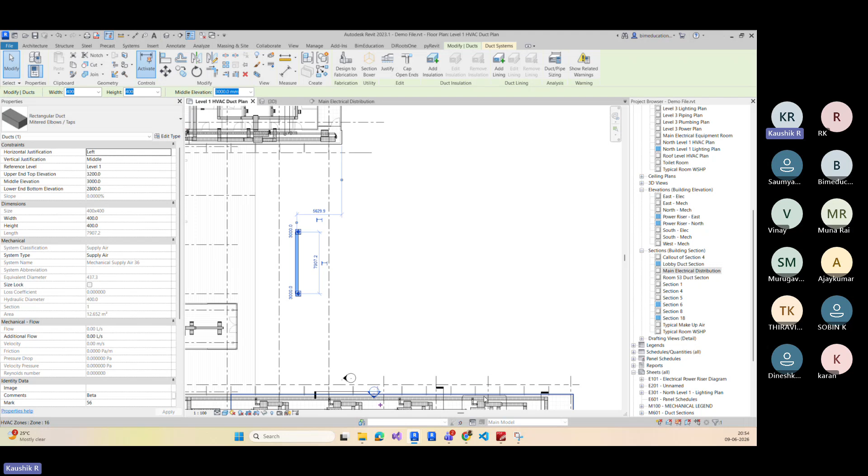That's the reason, guys, you have to join. So, Dynamo is a very easy tool, but you have to understand the logic and characteristics of Dynamo. That's what we are going to teach you guys. I already discussed these concepts. This is the entire syllabus - not only Dynamo concepts, we will also discuss geometric concepts.

How to calculate a distance between 2 points? The formula is root of x2 minus x1 the whole square plus y2 minus y1 the whole square plus z2 minus z1 the whole square. How to identify a direction between 2 points? The formula is x2 minus x1 comma y2 minus y1 comma z2 minus z1. How to normalize a vector? The formula is unit vector, modulus of AB vector equals AB vector divided by modulus of AB. These are the formulas you have to remember and understand.

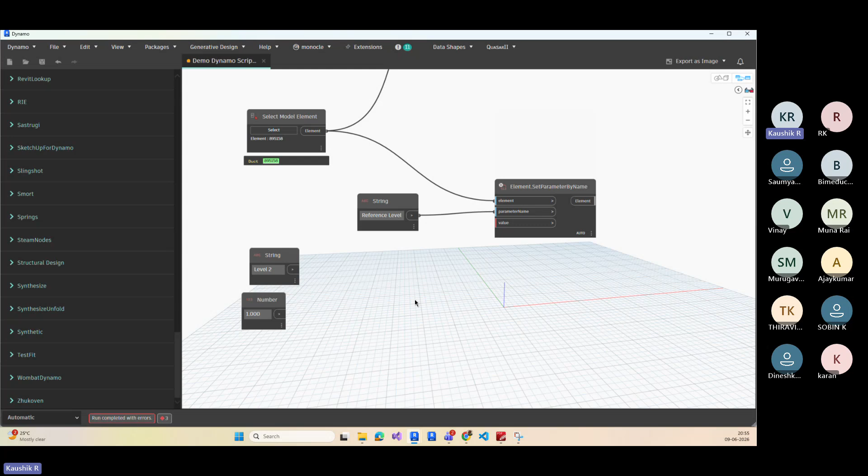I will give you a simple example by opening Paint. Consider I have a line. This is my line. My start point is A, my end point is B. This is 0 and the end point is around 10. My start point is 0, 0, 0. Then the end point will be 10, 0, 0. Between points A and B, I'm keeping another point.

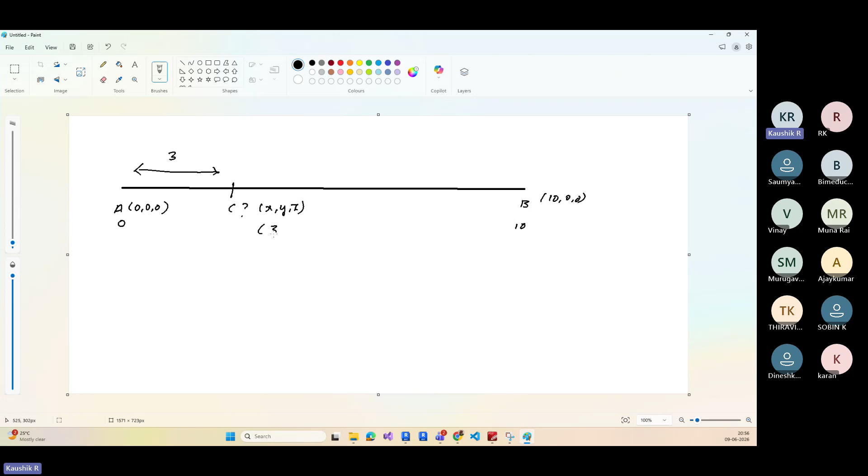At the distance of 3, now what will be point C? What will be the x value, y value, z value? 3, 0, 0. Wonderful, the answer is right. But how are you telling 3, 0, 0? Is it x, y, z? No. By direction, viewing x will be 3. The x direction value, y will be the distance, the direction along x direction is 3. How are you telling that?

So what I told, the formula to identify the vector between 2 points A to B: x2 minus x1, comma y2 minus y1, comma z2 minus z1. If I implement this formula, 10 minus 0 comma 0, 0, 0, 0 - this will be my vector, 10, 0, 0. This is my AB vector. In this direction, I want to place the family at a distance of 3 meters, which means if you multiply this, the point will be 30, 0, 0 only.

Then what do we have to do here? You have to normalize your vector. Sorry, normalize means not this one. AB cap equals AB vector divided by modulus of AB.

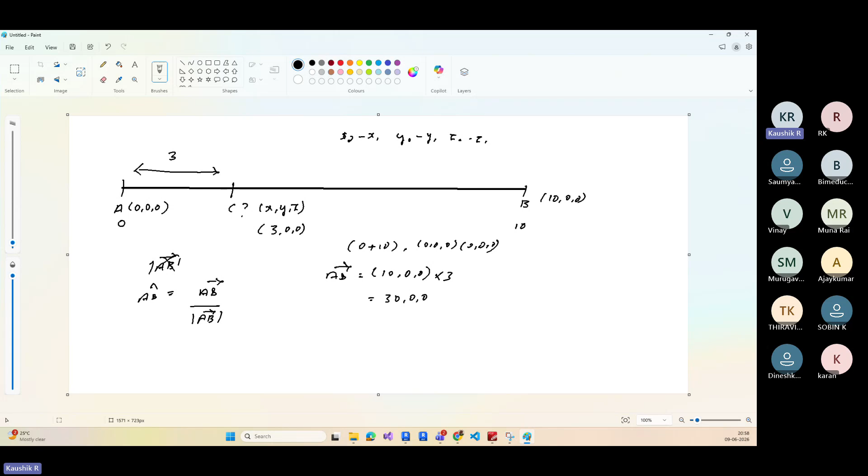I know these are school concepts which you are supposed to learn. Whatever concepts you're supposed to learn, like what is meant by point, what is meant by vector, trigonometry concepts - everything we are going to discuss here through visualization. When we talk about vectors in school days, we know how it worked, right? We just blindly trust it, we memorize the formulas and everything. But here you can visually view how it works.

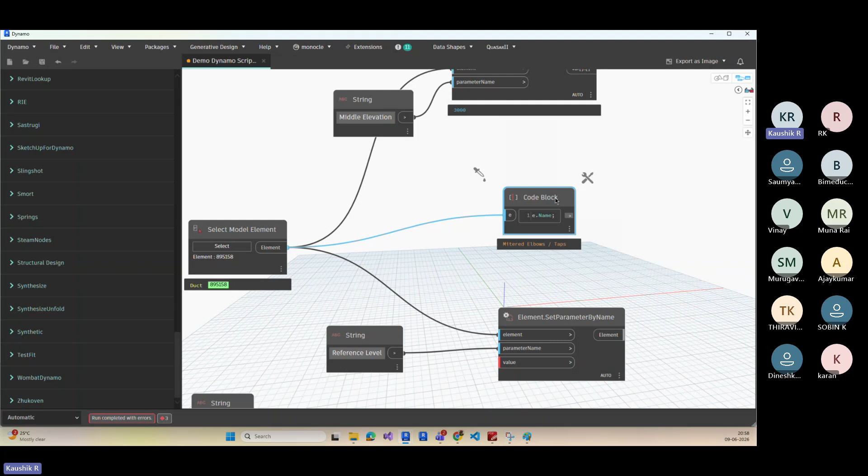Another example: if I want element.name, we are right-clicking element.name, right? That's how we assist, there is a shortcut here. Double click, I'm telling simply e.name. So if I use this, it will also give me the same output. Then what is this? This is known as a code block, which is a shortcut. We will also discuss about these things.

Any doubts so far? That's the entire concept which I completed. Now if you have any questions, please let me know, we can discuss now.